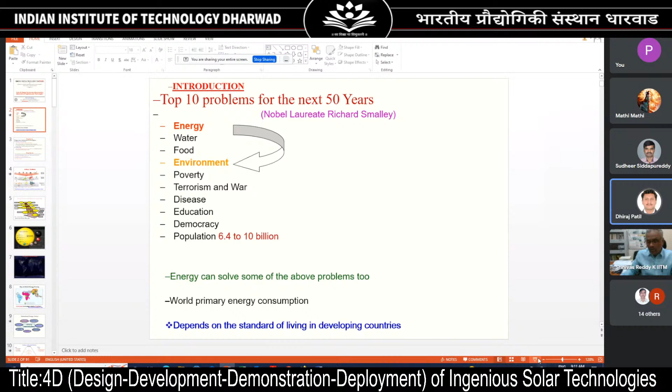There are several problems which we are facing for the next five decades. The problems you can see here are energy, water, food, environment, poverty, terrorism and war, diseases, education, democracy, and population. But as you know, the population is growing rapidly and exponentially.

If you look at the first problem, it is energy, and of course it's more relevant to the activities of the center. The present energy scenario is basically driven by fossil fuels. Therefore, the problem of energy cannot be addressed in isolation; it is always tied with the environment. So the energy-environment interactions are important.

Energy can solve many of these problems because energy has become a geopolitical issue. That's why you have seen a lot of unrest and wars happening across the world because of this commodity, energy. Therefore, the world's primary energy is growing rapidly.

Energy consumption mainly represents the standard of living of any individual or country. It is increasing because of population growth, industrialization, and the increase in standard of living, since per capita energy consumption is increasing. Therefore, overall energy consumption is also increasing, and it's important to come up with a solution for the energy problem.

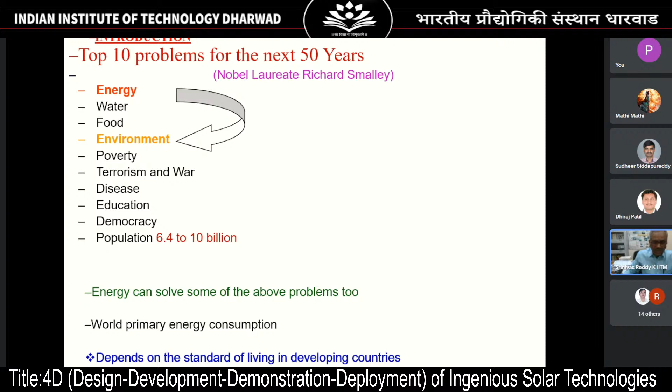But of course, the environmental issue also needs to be addressed in tandem with energy. I'll give you quickly how these energy sources are grouped and what they are.

Energy sources are broadly grouped into two: celestial or income energy, and capital energy. Celestial energy is energy reaching the Earth from outer space, including solar and lunar energies, referred to as non-depletable electromagnetic, gravitational, and particle energy from stars, planets, and the moon, as well as potential energy of meteorites entering Earth's atmosphere. Any energy source coming from outer space to Earth is celestial or income. Most renewable energy falls under this category.

The next category is capital energy, the energy that already exists in or on the Earth, mainly atomic energy: fossil fuels and nuclear. Apart from these, there are untapped renewable energies like geothermal.

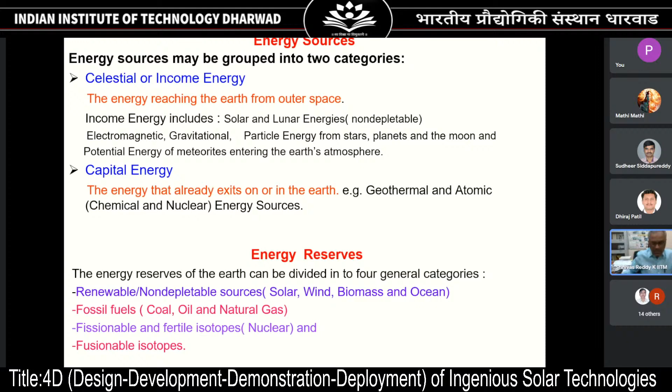If you look at it, present primary energy consumption is based on fossil fuels. The reserves are unevenly distributed across the world. But if you classify these reserves into four categories: renewables as a non-depletable source, fossil fuels, and nuclear, both fusion and fission-based fuels, isotopes.

If you look at the energy system hierarchy, it starts with the energy source to the energy equipment, through energy carriers. The energy source can mainly be the primary energy source, which includes fossil, renewable, and nuclear. Fossil fuels are primarily coal, oil, gas, and then biomass and nuclear. Renewables include solar, wind, biomass. These primary energy sources are transformed into secondary energy carriers, mainly the high quality energy, which is electricity. The other one is liquid fuels, which is further transformed into utility scale energy source for application.

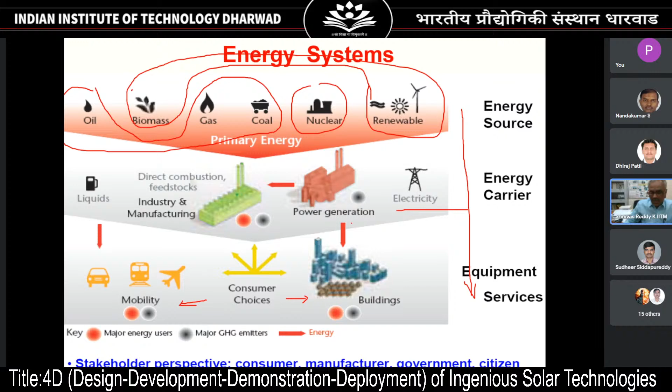This application can be based on the consumer choice. It could be for buildings, or for mobility, or for any other applications. In this conversion process, primary to secondary and subsequent utilization, there are substantial inefficiencies involved at every conversion location. So it is important to address that problem.

If you look at the energy sources and services through the timeline, the primary energy is majorly controlled by fossil fuel. Pre-industrialization, the industrialization started somewhere around 1770. Pre-industrialization, the major energy source was sunlight, which fed energy in terms of animal force. But subsequently in 1770, the commercial utilization of fossil fuels started. Since then, energy conversion and transformation have substantially improved and evolved commercially.

As the energy consumption increased rapidly, it obviously has adverse implications on the other side. If you look at energy services and sources over the timeline, as we move forward, the quality of the fuel is increasing. Coal was started, and then subsequently gasoline. As we move from coal to gasoline, the obvious thing is the calorific value or end use efficiency improves.

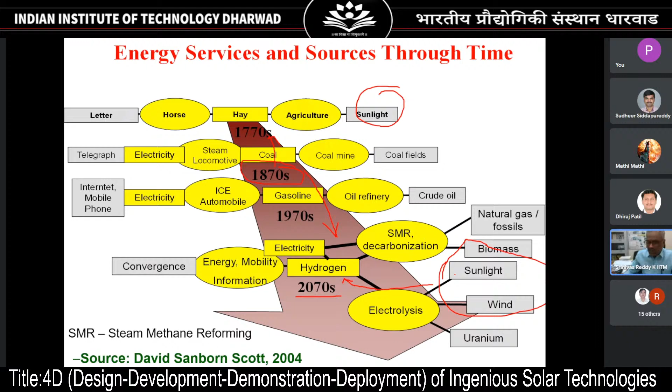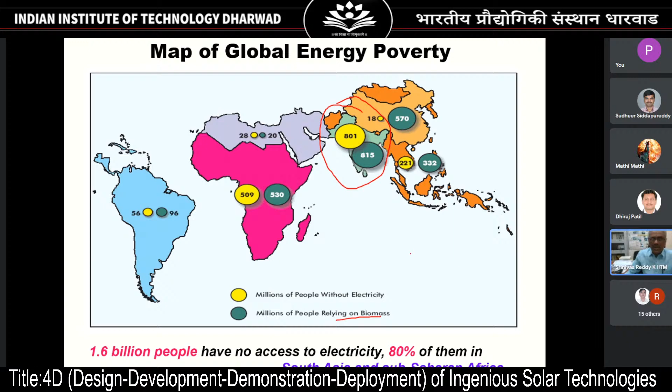Apart from that, high quality energy like electricity has to be properly distributed and accessible. Still there are several million people who do not have access to electricity. So it is very important to come up with a sustainable energy solution for that.

If you look at the international context, as far as the energy scene is concerned, we have high energy prices and security of supply concerns, because we are mainly dependent on imports, so there's a supply shortage and supply security is a major concern. Climate change, as we are over dependent on fossil fuels, is a major threat. And demand is also growing rapidly because of industrialization, improving standard of living, and population growth.

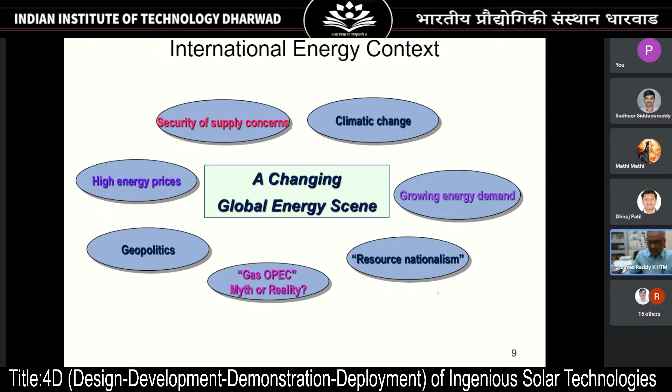Apart from that, resource nationalism and geopolitics - we have seen recently how the world is facing this geopolitically, because energy is a major issue, and of course the control over energy sources. So this scenario may create unrest among the countries.

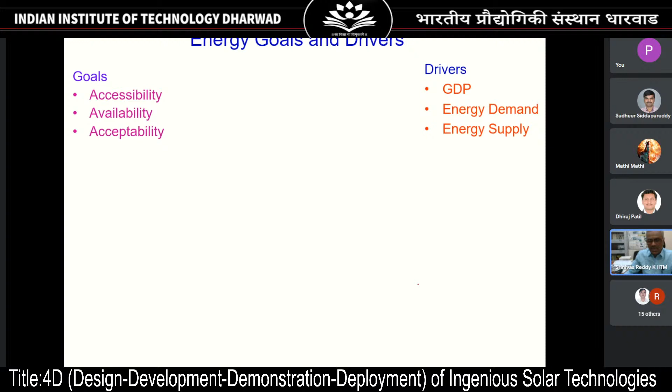So it is important to know the basic goals and drivers as far as energy is concerned. The goals for energy are energy accessibility, energy availability, and energy acceptability. The drivers are mainly GDP, energy demand, and energy supply, and they are dynamically linked with demography, environment, institutions, prices and technologies. They have to be based on availability, security, acceptability, effectiveness, efficiency, accessibility - all these play an important role, including affordability.

So this is called the 3A criteria. The 3A criteria is very important, but if you look at it holistically, it's a 6A criteria, which includes energy accessibility, affordability, acceptability, adoptability, appropriateness, and assurability of energy sources - these are all important.

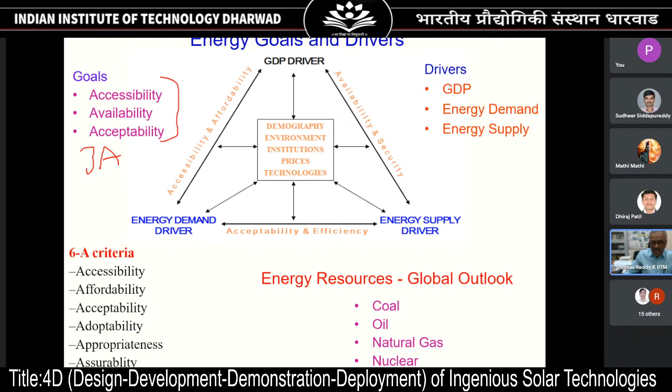Now if you look at the present energy outlook, it's primarily coal, oil, gas, and nuclear, but renewable energy is gaining momentum now, and the future energy scenario is targeting net zero. In that condition, I think in another 50 years from now, it has to be a different energy scenario.

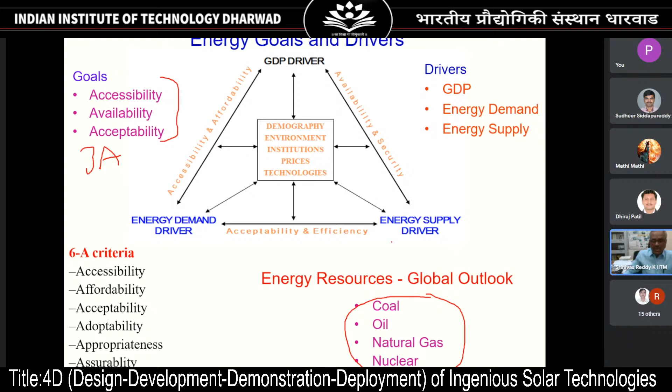So it is very important for such conditions that we need to come up with indigenous technologies, Atmanirbhar technologies. Why? Because as far as the energy scene is concerned, oil is one of the important fuels being used across the globe.

If you look at the resources in terms of reserves, the reserve to production ratio is somewhere close to 40 - that means global oil can even last for about another 40 years. Of course this is highly unevenly distributed across the globe, some locations are very low and some are higher value. This is an important concern, and it's alarming that over dependency on oil imports will create a lot of problems and also create unrest among people.

So it is important to look at the resources, and as you know most of the oil reserves peaked in 2005. So there are limited oil reserves, and we have to come up with new technologies which can drill deeper and deeper. If you go deeper and deeper, we'll get energy reserves and resources which can be used for present energy demand, but the technology which can cater to the needs of the energy demand is important.

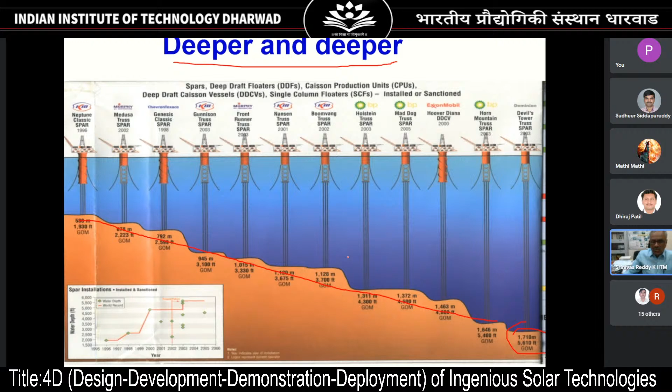If you look at that, if you go deeper and deeper for oil exploration, as you can see here, about 1.7 kilometers deeper - reserves can also be tapped effectively and economically. Future technologies can even make some of these untapped reserves or resources explorable. But the problem is the environment is a major concern, so sustainability is an important issue here.

So we feel that we deserve these types of luxurious energy systems, but the technology, as far as India is concerned - my topic is on indigenous technology development - if we are over dependent on foreign technologies, obviously there is an issue. Even however much we import the technology, the energy source which fuels the technology is also important.

As you know, as far as automobiles are concerned, we are importing - this is an imported technology, and it is powered by an imported fuel, polluting the Indian environment because of proper or improper infrastructure. So eventually, if there is unrest and no supply of foreign fuel, obviously sustainability becomes a major problem.

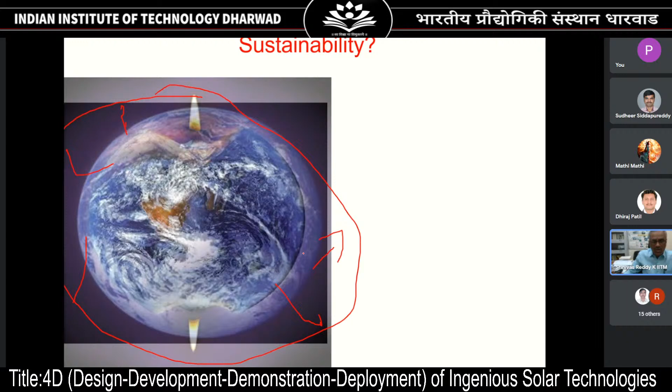What is happening is the energy sustainability as far as the globe is concerned. We are now experiencing these issues here. So therefore, if you look at the globe, this globe is surrounded by the atmosphere, and because of indiscriminate use of fossil fuels, the entire atmosphere is getting imbalanced. That means it's overloaded, and we are literally firing off the Earth's environment, imbalancing it by overloading the environment with pollutants. So therefore, any overloaded system will be imbalanced like this.

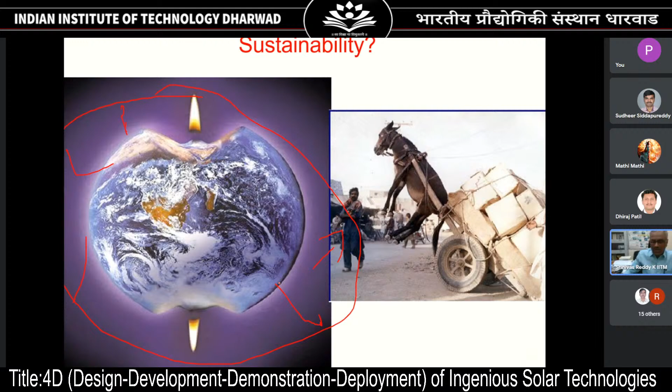So therefore, resource sustainability is very important. Resources are limited here, and if there's no technology, you can consume this, and then it becomes empty after some time. As I mentioned, the reserve to production ratio as far as oil is concerned is about 40 years. And after 40 years, you cannot see any source. So therefore, it is important to develop an indigenous technology to keep these reserves for the future generation.

So therefore, if you develop a technology which keeps the reserves for the future while taking our own share here, this is the low-lying one, easy to tap, but this is difficult, because you have to develop a technology. This technology, as far as energy resources are concerned, is renewable energy technology. So if you develop these renewable energy technologies for local conditions, that's what I mentioned, Atmanirbhar. If you're dependent on your own technology, it's better, and we can save a lot of foreign exchange also.

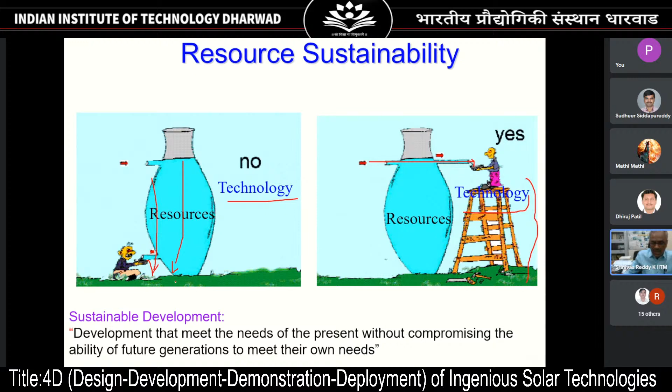So the standard definition of sustainable development is the development that meets the needs of the present without compromising the ability of future generations to meet their own needs. That means you try to use your share of energy rather than the future generation's, because otherwise it will not be sustainable. We should not consume the future generation's energy as per our requirement. That's why the future generation says that there is only one Earth we have to take care of. So energy sustainability can be attained by developing appropriate indigenous Atmanirbhar technologies.

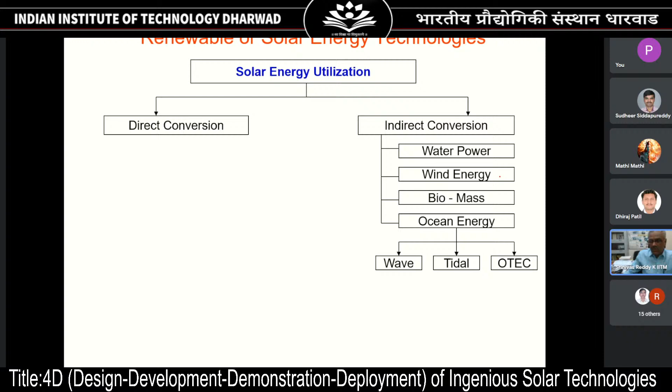So therefore, as a part of this, it's your money, your environment, your mission. We have to conserve the Earth here. The right thing to do is develop indigenous technologies. These indigenous technologies are renewable energy or solar energy technologies. And regarding solar energy conversion, I am giving you a brief overview. Solar energy can be indirectly converted into various other forms of renewables. These other renewables are manifestations of solar.

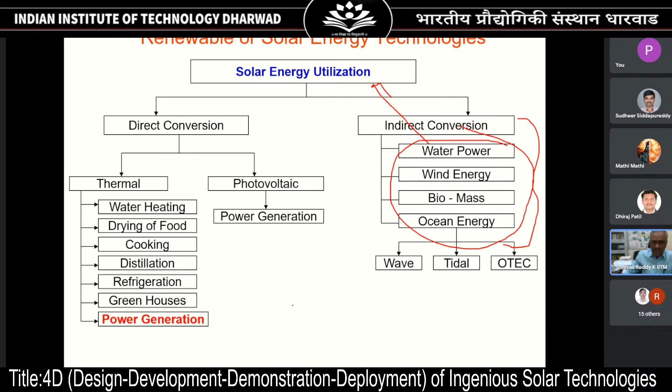And there's solar energy direct conversion in terms of photovoltaics, that is, power generation. The other one is solar energy conversion through heat. That has a wide variety of applications, including water heating, drying of foods, cooking, distillation, refrigeration, greenhouses, and of course power generation. This is through the thermal route. And then concentrating solar power plants are very important because of their end-use efficiencies.

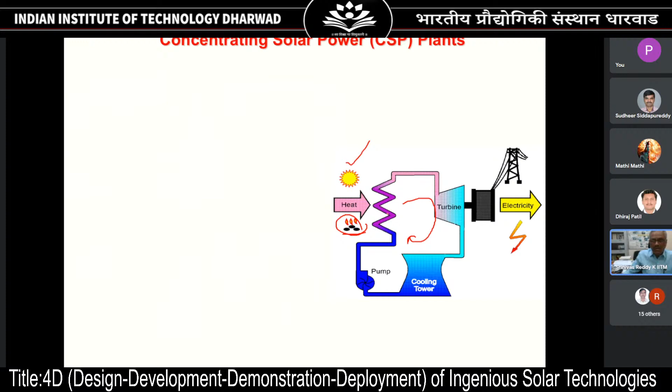You know very well thermal power generation using a heat engine, and in this heat engine the working fluid undergoes a cyclic process, but the heat is supplied by fossil fuels. If this heat is replaced by the sun, then it's called a solar power plant or concentrating solar power. The conversion of solar energy to heat is by various technologies. These 4 technologies have reached the stage of maturity: parabolic trough, parabolic dish, linear Fresnel reflector, power tower. I will quickly explain what they are and how they work. These 4 technologies have reached a commercial stage where they can directly supply existing coal-based power plants, or you can replace coal by solar.

Based on temperature, these 4 technologies are broadly classified into 2. One is medium temperature, the other is high temperature. Medium temperature is in the range of 100 to 400, whereas anything beyond 400 gives you the higher temperature application. These are the two technologies for this, and these two technologies for that.

At IIT Madras, we are working on various indigenous technology developments through a 4D approach: design, development, demonstration, and deployment. So this 4D approach takes technology from design to deployment. Of course, the next stage is commercialization with our industrial collaborators.

Broadly, the research areas in solar energy at IIT Madras include concentrating solar power, as I just mentioned, mainly for developing concentrating solar power technologies for power generation as well as green hydrogen production. Then development of receivers for different concentrating solar systems. And apart from that, CPV, the concentrating photovoltaic system, is also important because the same concentrators can be used for photovoltaics to obtain higher efficiencies, and also for cogeneration applications.

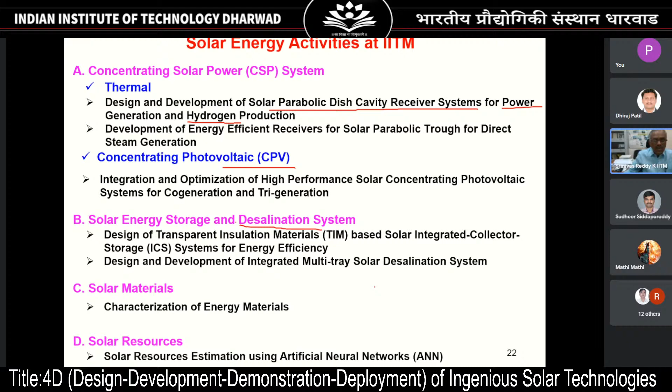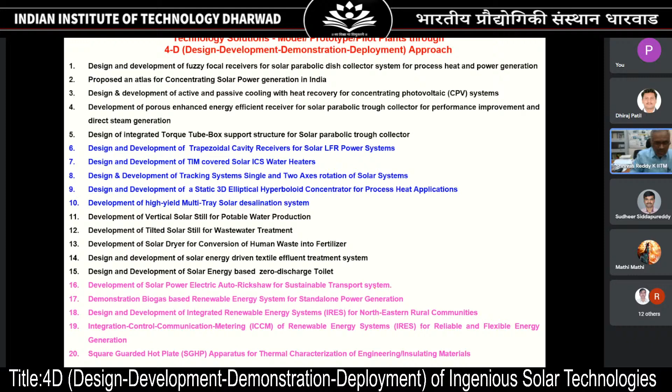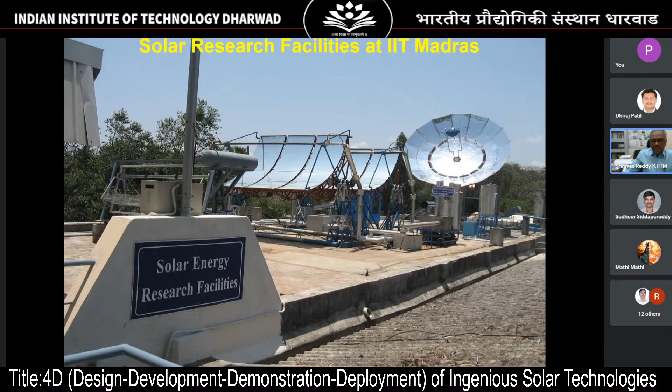These are the solar research facilities at IIT Madras, mainly concentrating solar power, but I'll also show you the other technologies. This is a parabolic dish, a point focusing concentrator, which concentrates solar energy and reflects it to the focal point. The concentrated energy is transformed into heat and utilized for various applications, producing about 15 kilowatts at 640 degrees Celsius. Since it's point focusing and 3D, it needs 2-axis tracking, elevation and azimuth.

We also have this PV system with tracking, because tracking can improve the performance of the PV to some extent, and it also gives uniform output throughout the day. Another one is the desalination I mentioned just now, seawater desalination, converting seawater into potable water.

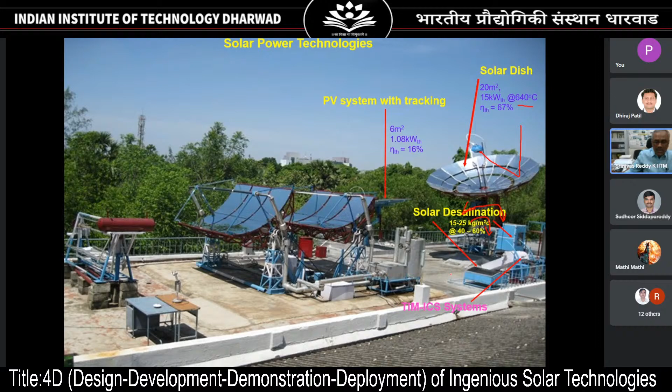And this is a 2-dimensional parabola, parabolic in one shape and linear in the other, which converts solar energy into heat by reflecting solar radiation, and it requires only single axis tracking from morning to evening, unlike the previous one. So it's simple compared to that, but that is why it gives relatively lower performance and lower temperature.

Another important one is the concentrating photovoltaic system. This is a cogeneration system which can produce both electricity and heat, because concentrating solar energy on PV cells improves the efficiency, but simultaneously it generates heat, which can be removed and used for various other applications. So therefore, it's a cogeneration system. And solar radiation measurement is also important.

If you look at another view of these systems, the backside view, as I mentioned, it is a 4D approach: design, development, and demonstration, and all 3 Ds are done in our lab. So most of these systems are commercial scale, so they can be taken easily and directly to the field for deployment. Therefore, it is a direct adoption of the technology into the field.

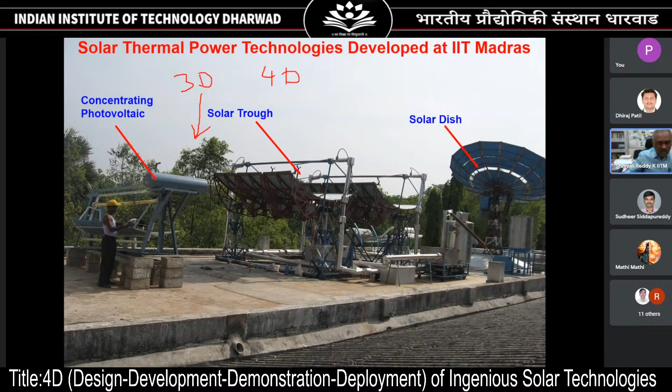If you look closely at how the concentrating solar system works, it is a 3-dimensional parabola with mirrors. It's a reflective system, and it reflects solar radiation onto the receiver. The design of this receiver, the system, its development and deployment is important. Our approach is first the design of the system, mainly for high temperature, high pressure applications, and we developed cavity receivers for absorbing solar radiation at the focal point.

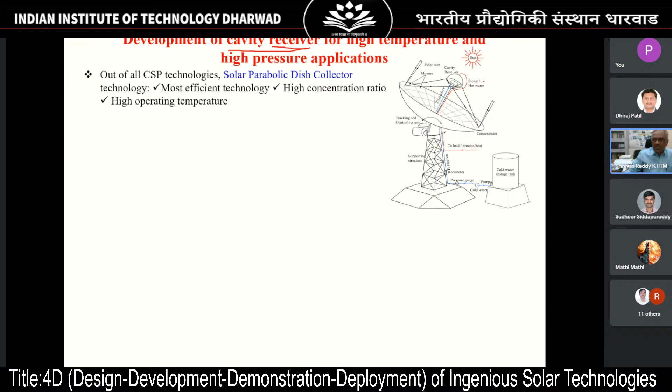So this is a 3-dimensional parabola. Any ray which is normal to the surface will reflect to the focus, and at the focal point you have a receiver; if you produce steam, it's a boiler, or if you produce hot water, it's a heater. This is the design. Essentially, there are 3 designs: optical design, thermal design, structural design.

So therefore, how optics works, how structure works, and how thermal energy conversion is, and this design approach involves all three approaches: optical, thermal, and structural. It is important to come up with an optimal configuration of the system.

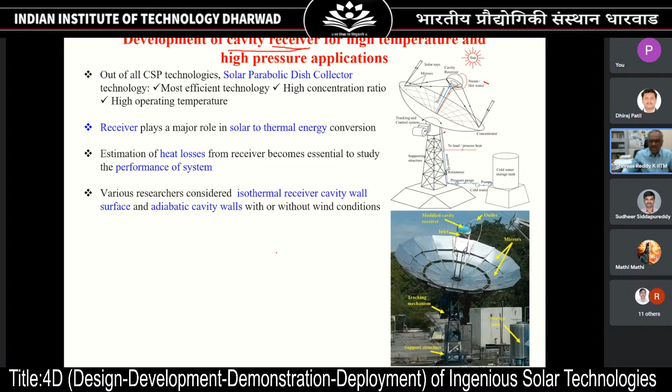So the receiver plays an important role in the thermal system, and when it is exposed to the atmosphere, it loses heat. A major fraction of heat is lost to the environment. So in order to minimize the heat losses, one should come up with an optimal or effective system configuration. Various systems have been proposed for different conditions. The same system has to be used for process heat as well as power generation, and also low temperature applications.

So these three conditions have been considered: superheated, saturated, and subcooled, with temperature ranging from 180 to 500 degrees Celsius and pressure ranging from 10 to 40 bars. Based on this, they can have different applications. For example, superheated steam is used for megawatt power generation. Saturated steam is for food and textile industries, steam cooking, and other applications. Subcooled steam is used for air conditioning, paper, pulp, and other industries.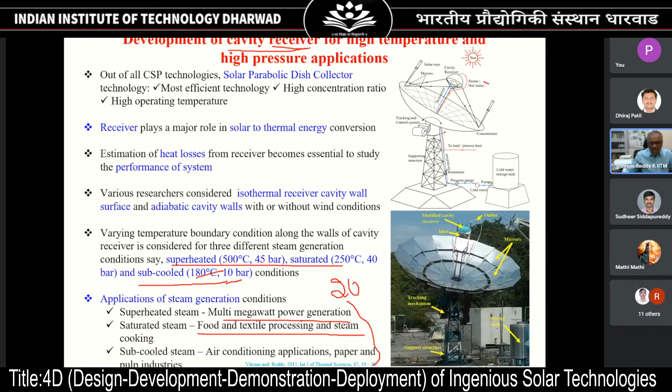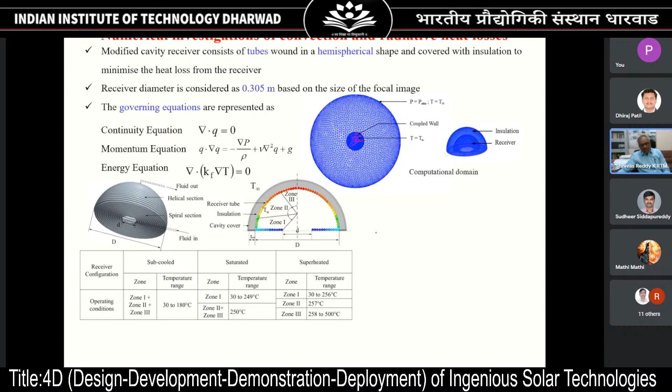Most of the process heat applications are below 260 degrees. First we do numerical modeling. I'm not going to discuss it in detail because of want of time. So this receiver has been designed and developed through different modelings. One of them is a numerical model, a 3-dimensional numerical model of a modified cavity receiver with different zones, and these zones represent subcooled, evaporation, and superheating conditions.

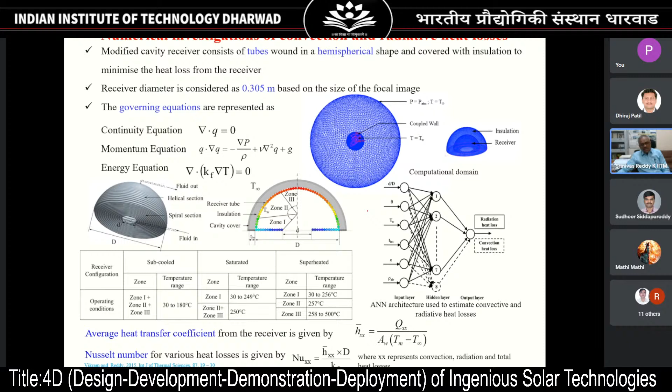And we use neural networks to estimate mainly the overall heat transfer coefficient and heat transfer characteristics, and then propose various receiver configurations. This is a parabola here, used to reflect the solar radiation. So we propose three types of receivers, which you can see here with their configuration, and ultimately we estimated the heat losses from the receiver throughout the day from morning to evening with the different configurations. It is found that a modified cavity receiver is the better configuration for absorbing maximum radiation with minimum losses.

So the design and development of the fuzzy focal dish is very important here. This is because a parabolic dish concentrates solar energy to the focal plane, but if the parabolic dish is very accurate, it creates a spot, a sun at the focal point. But it's very difficult to make an accurate parabola with fragile material like mirrors. Inaccuracies in the structure result in a fuzzy focus rather than a sharp focus, so you have a wider focal image. This wider focal image is also good because we don't need very high temperatures. For medium temperatures, up to the superheated condition, we can use the fuzzy focal dish, which means an inaccurate dish.

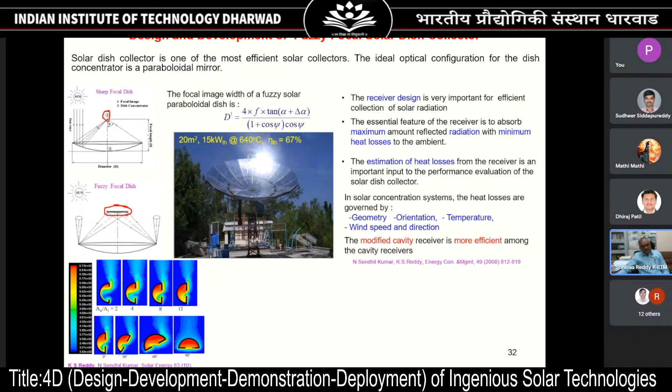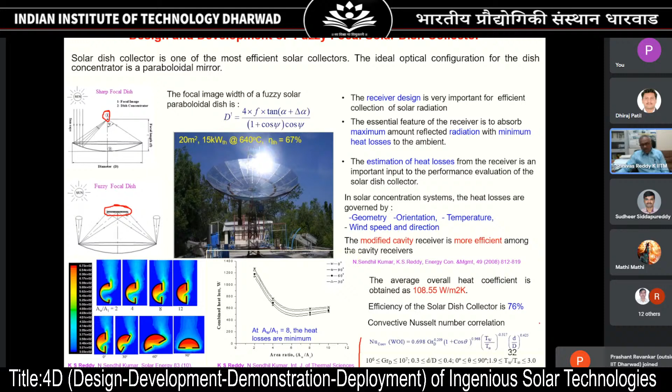The modified cavity receiver is found to be more efficient among the other cavity receivers, and subsequently it was rigorously investigated to find out the heat losses and come up with the appropriate configuration of the receiver. Based on the results, the dish collector efficiency is about 76%, and we proposed Nusselt number calculations for different dish conditions. Then we also studied radiative and convective heat losses from the modified cavity receiver, as presented here.

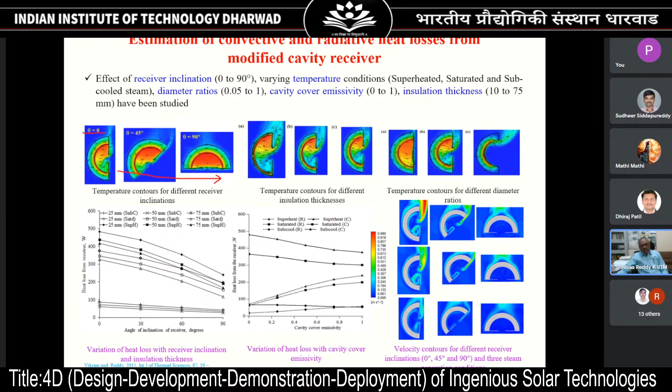As we change the configuration, three extreme points are taken. One is the zero inclination condition, the vertical position theta, and then the inclination of 90 degrees, because from morning to evening it keeps changing. So under different orientations, we see how the heat losses take place, and accordingly we can find the optimal configuration of the receiver, with the area ratios and so on. But this is one system. If you go for large scale power generation, such dishes are placed in a field, several thousands of dishes in one location.

There is a possibility of casting an image or shadow of one system on the other one. So here if you look at that, there's one dish here, and on the back side of this dish another dish is there, and some part of it is shadowed. So that means the dish which is at the back side will produce less energy compared to the front one, and there is a possibility of hot spots coming here.

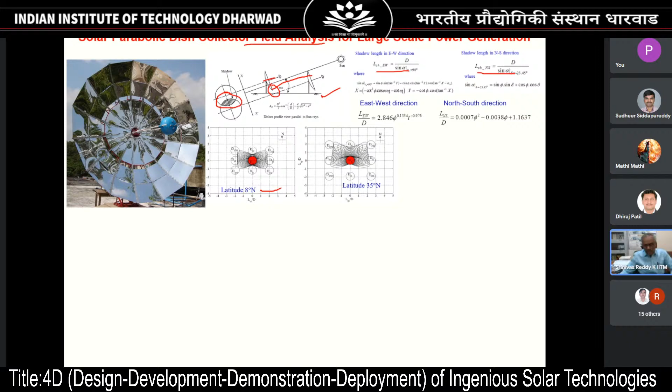So we have done a comprehensive analysis of the field for large scale power generation. What should be the space between two consecutive systems, in both the east-west direction as well as the north-south direction? We have studied the entire country from Kanyakumari to Ladakh region, because it depends on the latitude. Latitude 8 degrees is Kanyakumari, and 35 degrees is the Ladakh Leh region.

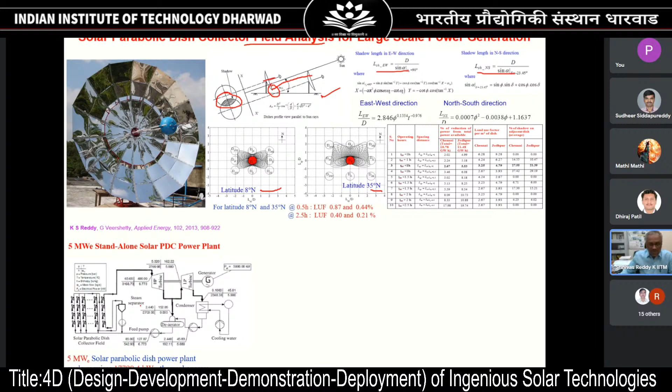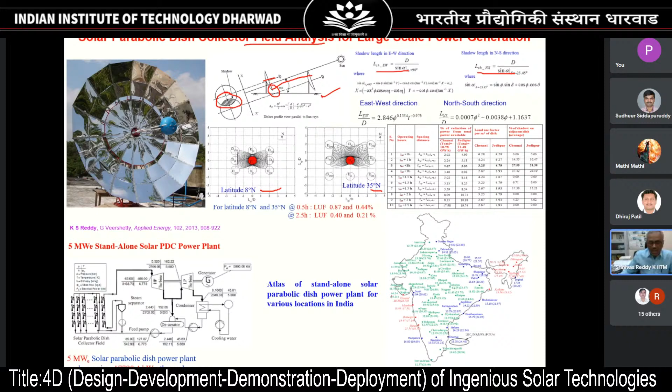So how these dishes will be oriented and what is the spacing between these dishes, we have come up with the operational strategy, and based on this, how to implement this collector field into the power plant for large scale power generation. We made an atlas of the entire country for viability of this technology. Wherever the green colors are, that is commercially viable. Blue colors are commercially viable under certain conditions, but red color locations are not viable with the present technology. In future, it may become viable.

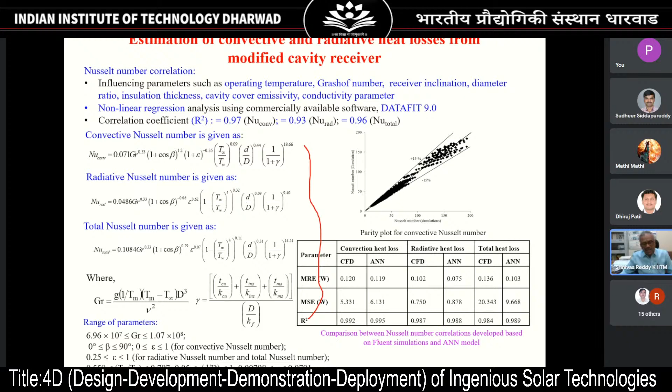Then we have to do estimation of both convective and radiative losses from the modified cavity receiver. I have shown this for some of your students' academic interest. Here we developed Nusselt numbers for convection, radiation, and the total Nusselt number, and these results have been compared with CFD as well as neural networks, and it proved to be better. And the heat loss is also dependent on the orientation.

So this solar dish should be tracked continuously along the sun, and based on tracking, the position of the receiver is different. Not only that, it is also exposed to the open environment, and the wind blows in different directions with different velocities. So we have considered three winds: side-on wind, head-on wind, and back-on wind. If the wind comes from the back, the side, or the front, how do these heat transfer characteristics play a role, and how are the losses involved?

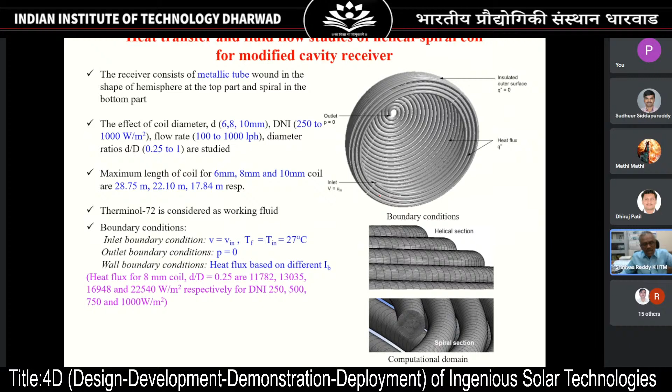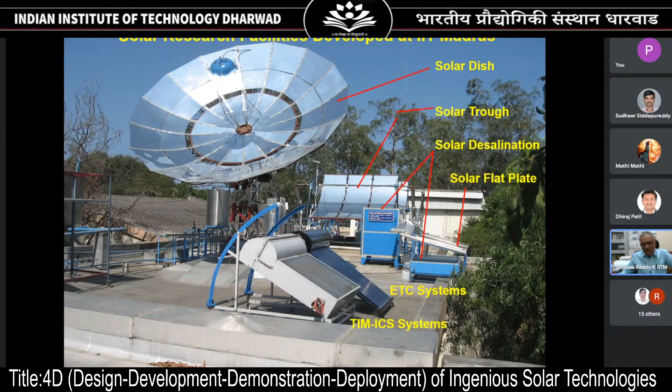Based on this, we have come up with a receiver configuration with a different analysis. This is a modified cavity receiver with a complete computational domain, and you can see the heat transfer of the fluid through a helical spiral coil. And you can look at the research facilities at IIT Madras: the dish, solar panel, and we have also concentrated on green hydrogen production using solar energy. The receiver is replaced by a reactor, in which methane from biogas can be used as a feedstock to produce carbon and hydrogen. Carbon is a good byproduct, and hydrogen is a good fuel.

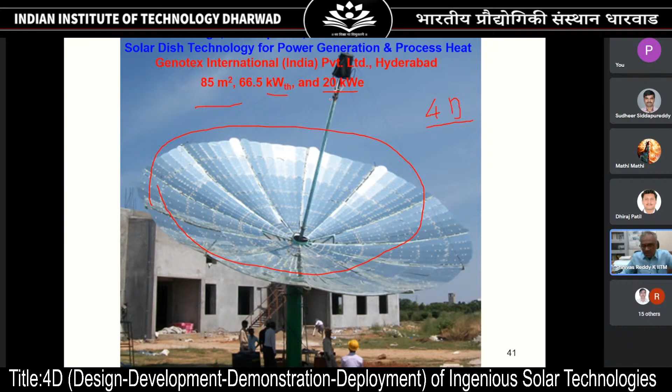And based on this, we have commercialized the fourth D, deployment. The deployment of our technology is done in a pharmaceutical industry here. This is the scaled up version. It's about 85 square meters area, which produced 66.5 kilowatt thermal. Another view: it's a massive structure, bigger than this 2-story building, about 10 meter diameter, and the radiation from the sun is reflected here. You can see the concentrated flux, and this is the receiver which converts the concentrated solar energy effectively.

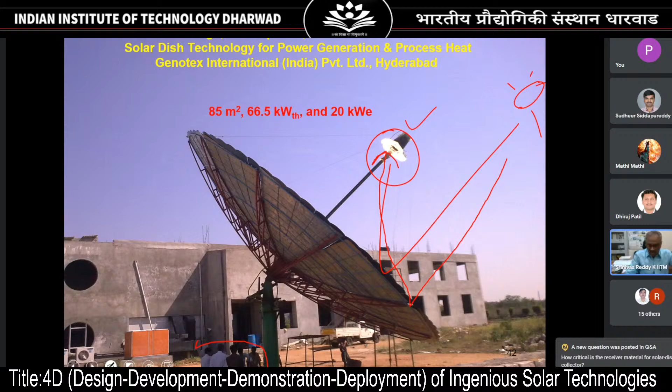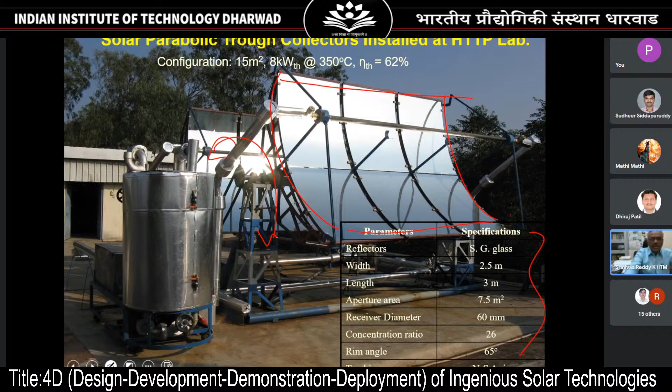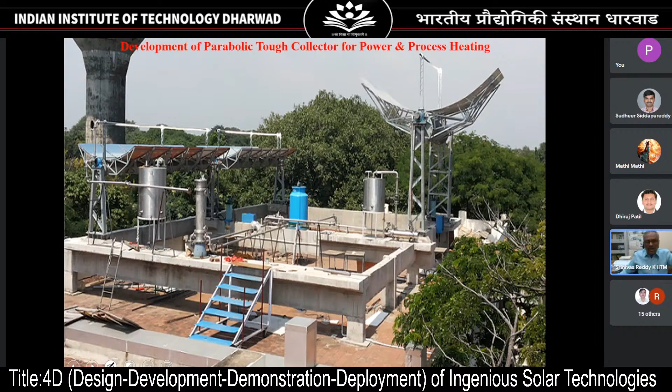Another technology is the parabolic trough. It is line focusing because it's a 2-dimensional parabola and cylindrical in the other direction, so it needs only single axis tracking, and the details are given here. In order to study parallel and series arrangements, two of them were made, and we have come up with process heat and power generation troughs, which are large, placed on the CRC classroom complex 4th floor, and we prepared the foundation. This is under construction. With this 5.77 meter aperture, it is used for process power generation.

We developed an integrated torque tube box support structure for this. This is a torque tube here, and this is a box structure, for which we have some patents. And this is a smaller one, about 2.5 meters, and this is almost double the capacity, 5 meters. One is used for direct steam generation, the other one is used for process heat applications through thermic fluid.

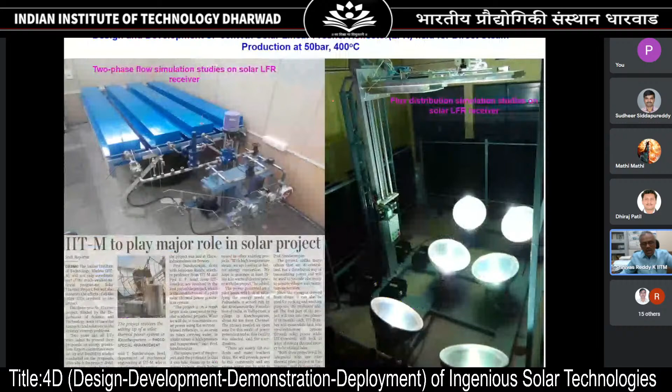And we installed another technology in a school with energy storage. This is a linear Fresnel reflector where the solar energy is focused onto the receiver here. And this receiver produces steam, which can be stored here. So we are also working on indoor experiments to develop this.

Another technology is a linear Fresnel reflector, where the large long collector field is driven by a motor which can track the sun's rays, and the rays are reflected onto the receiver. Then this receiver is used to convert the concentrated flux into heat by circulating some working fluid, whether the working fluid is water or it can be oil also.

If you use water, the water goes into the receiver here, then it goes further, takes a U shape and comes back here. The water is supplied here, and the steam you are getting is at high temperature and high pressure. We installed this in that school as a part of our activities. It's a 50 kilowatt system, producing electricity as well. And this is a 1 megawatt.

Apart from that, we have also developed dish technologies, mainly for process heat applications. We have developed square and circular dishes; one is used for CPV applications, and the other one for process heat, which is used in an air conditioner here. This is a first of its kind solar vapor absorption air conditioning system.

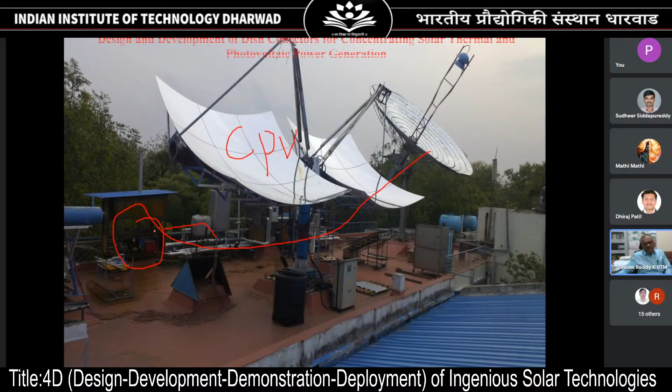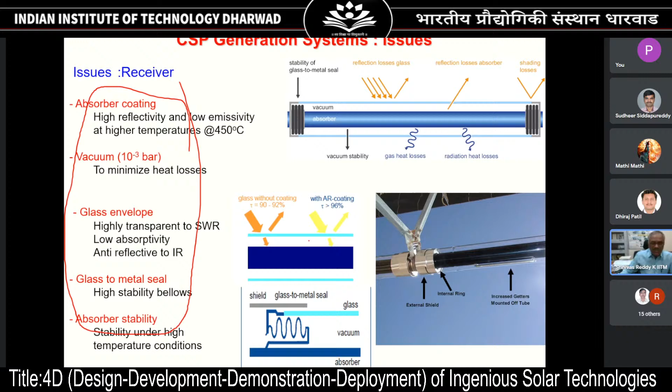In direct steam CSP systems, the receivers are important, and they involve various components like absorber coating, vacuum, glass envelope, glass to metal seal, and absorber stability. So they need to be studied as far as material characterization is concerned. So this is again a parabolic.

I will take another 5 minutes. Sure. Okay, is it okay? Okay. I'll complete before 10 o'clock.

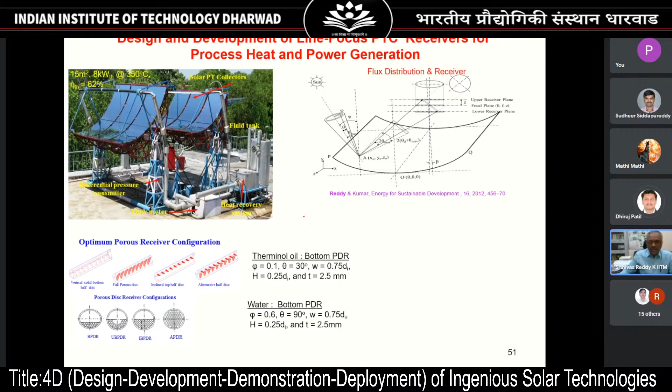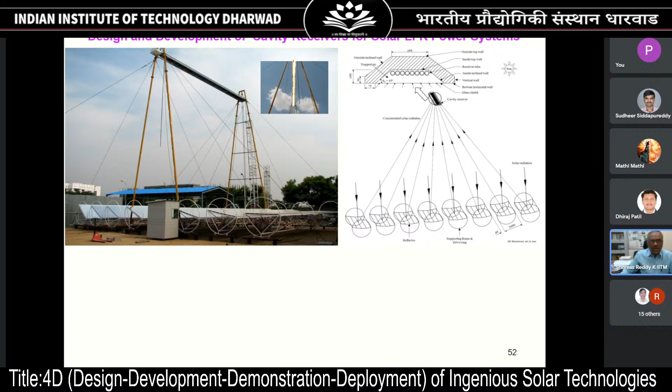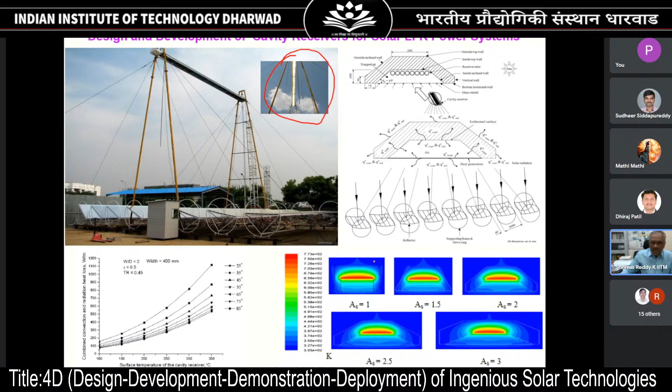So this is the parabolic trough collector, and this, which you have seen just now, is the linear Fresnel reflector, where 4D is used. That's why I'm showing how we can do optical, thermal, and structural analysis based on the 4D approach. Each receiver has to be designed for effective conversion from a heat and optical point of view. And this is what I just showed.

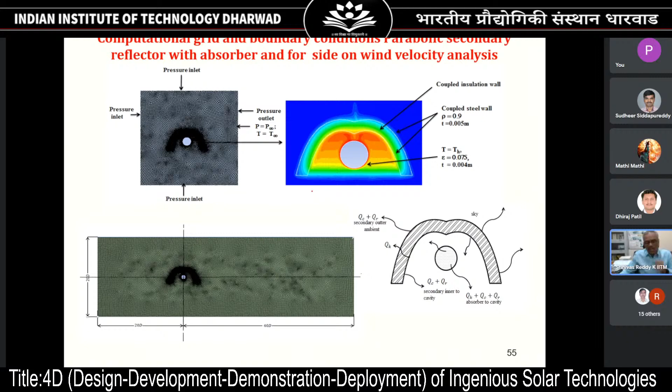It's installed in a school, where you can see the support structure, the receivers, implementation and flux distribution with respect to the receiver and the reflectors. Then we have done a lot of secondary reflector analysis in terms of thermal modeling, finding out how the temperature contours play an important role, and ultimately we came up with a three-dimensional receiver.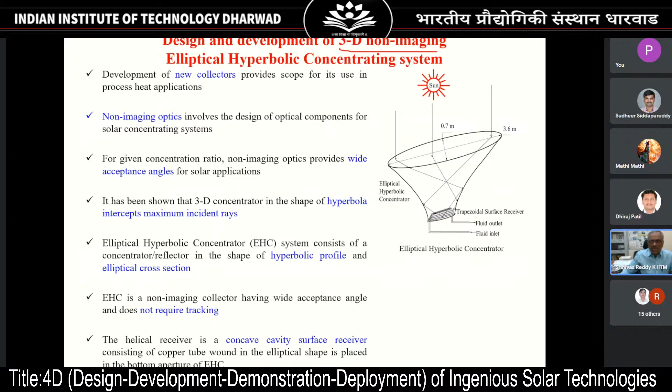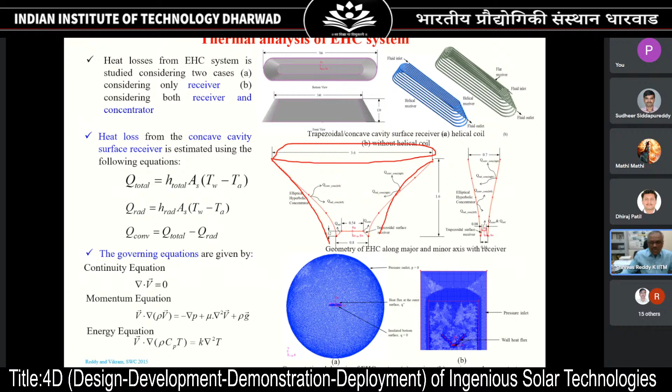There's another concentrating system which is passive and doesn't require any tracking, a novel system: a 3D non-imaging elliptical concentrator. I'll show you quickly how it looks. This is a hyperbolic cross section, but if you look at the top view, it's elliptical.

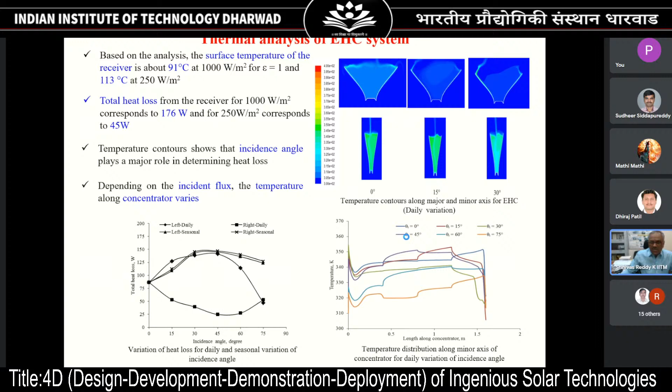Based on that, again as a part of 4D, we have to do the thermal, optical and structural analysis. This is a thermal analysis of this EHC, the elliptical hyperbolic concentrator system, showing the flux distribution and temperature distribution, and after that we built this EHC, with the receiver integrated at the bottom.

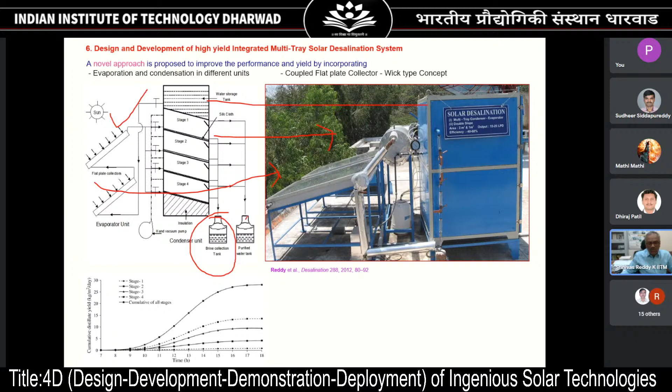As I mentioned, another activity is solar desalination, where solar energy is used to convert seawater into potable water. This is such a system. The principle is this, and when it is built as a technology through the 4D approach, it is this: the evaporator and the solar collectors, which produce pure water as well as some brine which can be treated subsequently. These are the technologies we implemented.

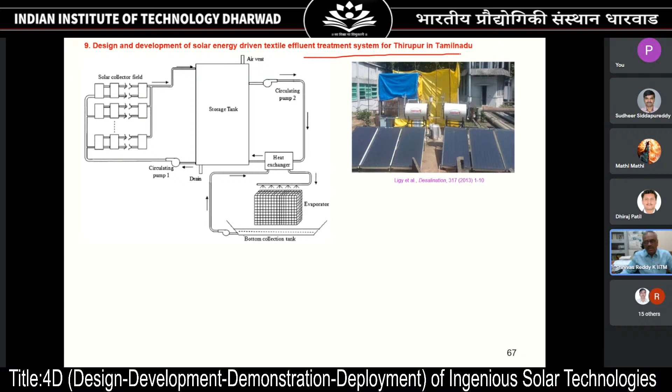Here you can see how the solar system is used for effluent treatment, mainly in textile industries. We implemented this in the textile industry as well, showing how solar process heat can be used. Another important thing is how to use solar energy for waste treatment, including both solid and liquid waste.

We developed a toilet which we call solar zero waste discharge toilet, neither liquid nor solid discharge. Both will be handled effectively - solid is recycled and liquid also recycled and used. It's installed in one of our students' hostels, Krishna hostel, in IIT Madras.

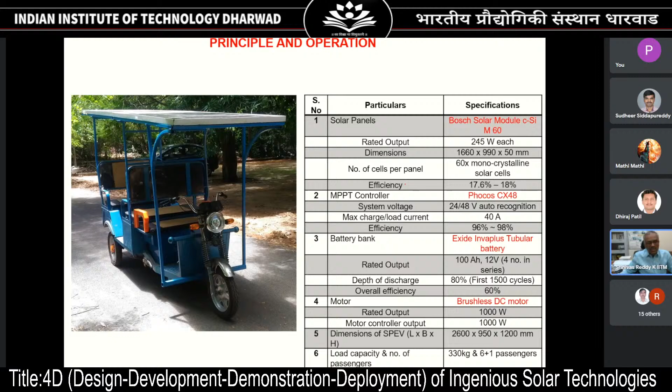We also worked on mobility, solar mobility, solar powered electric vehicles. This solar electric vehicle is covered with a solar panel, and this complete design has been done here.

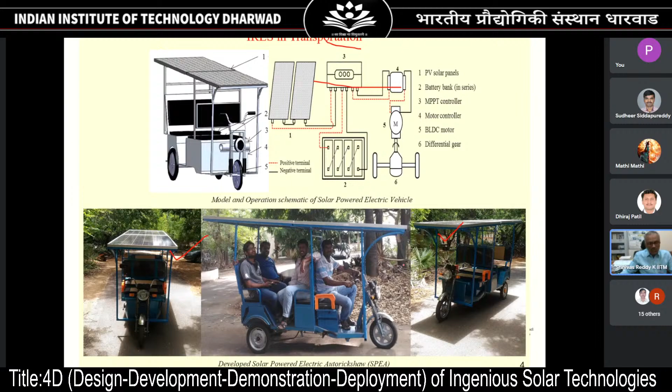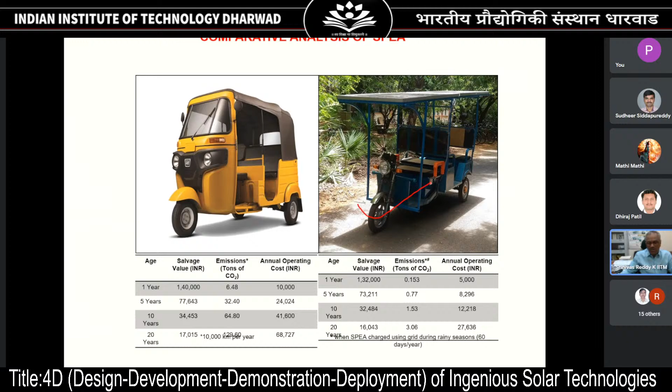We have done all these systems at the laboratory, including this as well. This is comparative analysis of the vehicle that has been carried out, and it is also compared with commercial autos. It's proved that it's economically viable here with a low payback period.

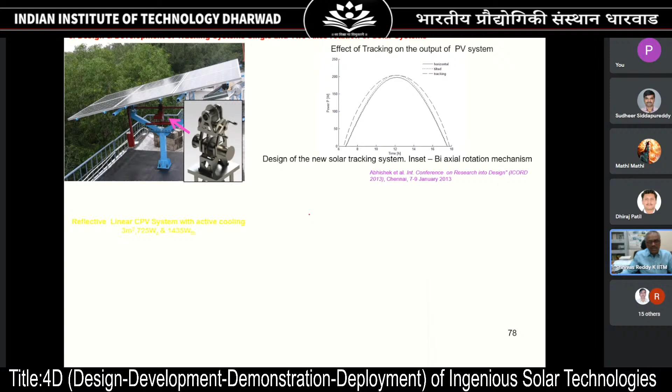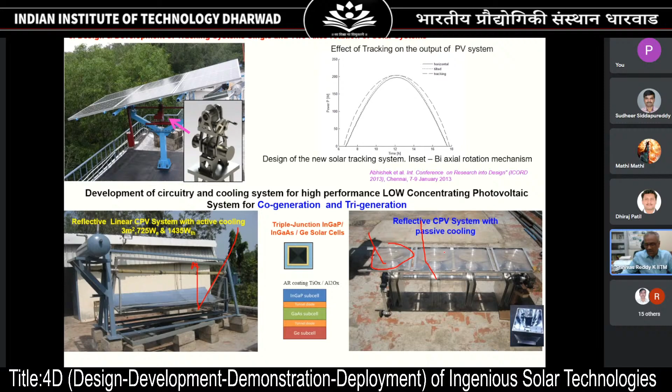This is another system, an integrated collector storage system, and then you have a tracking system for the PV panels, because tracking plays an important role. Apart from that, you have reflective concentrated systems, but you also have a refractor, lens-based system, where the solar energy is refracted to a point focusing system.

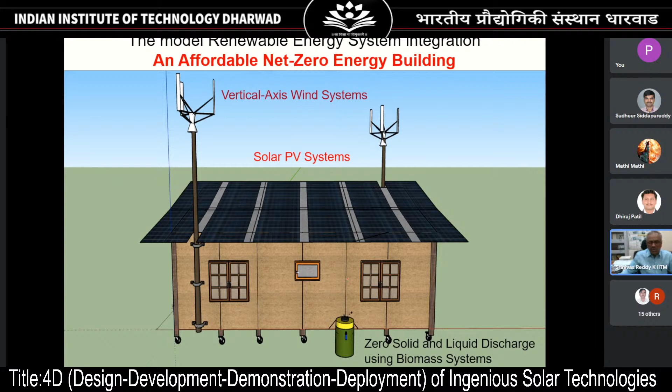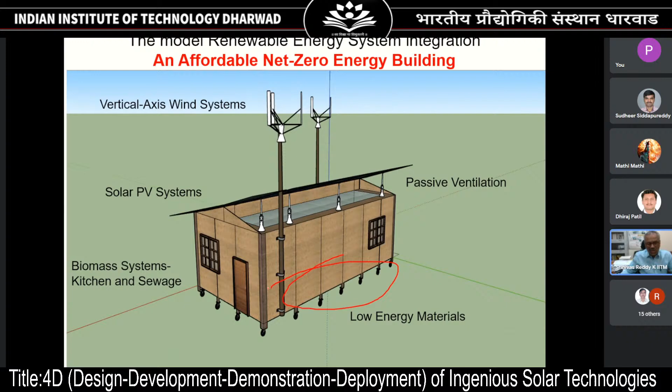Another one is the affordable net zero energy building, where solar and wind can be used as part of the building - we are talking about net zero energy buildings. Solid waste can also be treated, but this is at a conceptual level so I'm not giving details here. With wind and solar both, and being portable, we can move it anywhere as per the requirement. This is what we are talking about in India - affordable housing. This will be a solution for affordable housing.